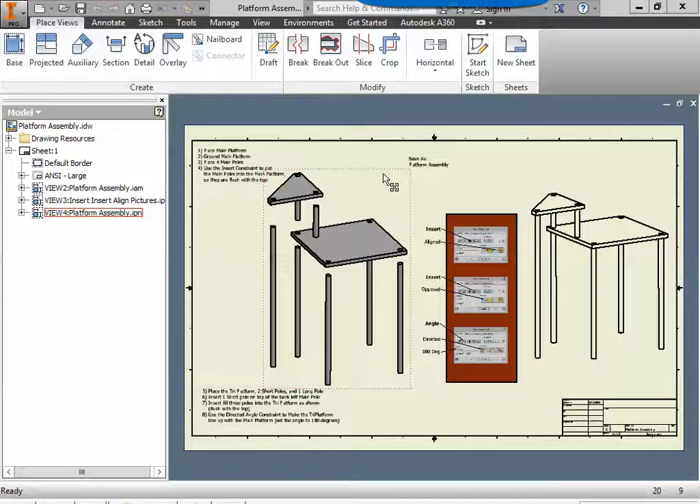In this episode, we're going to look at how to assemble the platforms together.

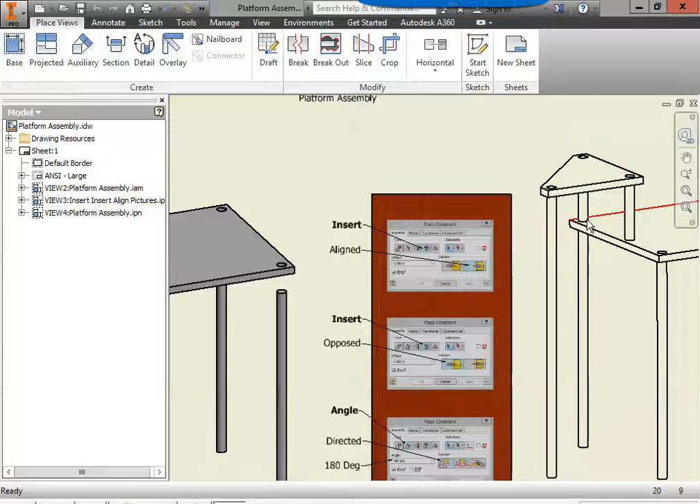Let's look at some of the tools or constraints we're going to use. We're going to use insert aligned so we can attach the poles into the holes. We're going to use insert opposed so we can put this short pole on top of here. And then we're going to use an angle constraint so we can turn this tri-platform so it lines up in the direction we'd like.

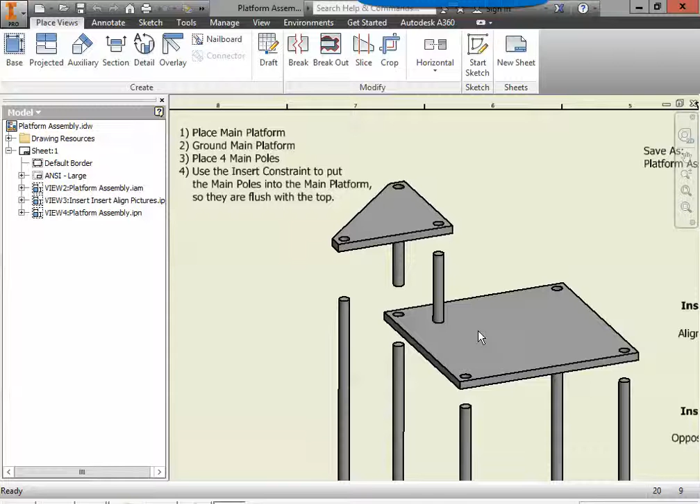Let's see the first 4 steps we should start with. Place the main platform, which is this. Ground it so it can't move. We're going to make sure we ground one part, and that's the main platform, only one part. And then we're going to put in the 4 main poles that go under it, and insert them into the main platform.

Alright, let's go to Inventor, a new standard IAM. We can go ahead and click place. We'll be placing the main platform. Looks a little weird, it's a little big. Go ahead and just click to place it. And it'd like you to put more main platforms in, but we don't need any more, so we'll just hit escape to drop our place tool.

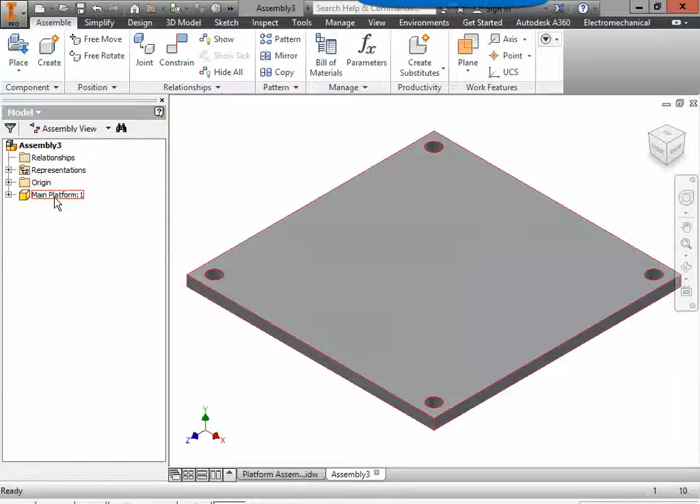Before we put poles in, let's ground this main platform so it cannot move on us. Over in the browser bar, we're going to come to main platform, right click on it, and select grounded.

Then we're going to come into place, and we're going to put 4 main poles. 1, 2, 3, 4 main poles. Hit escape to drop your tool.

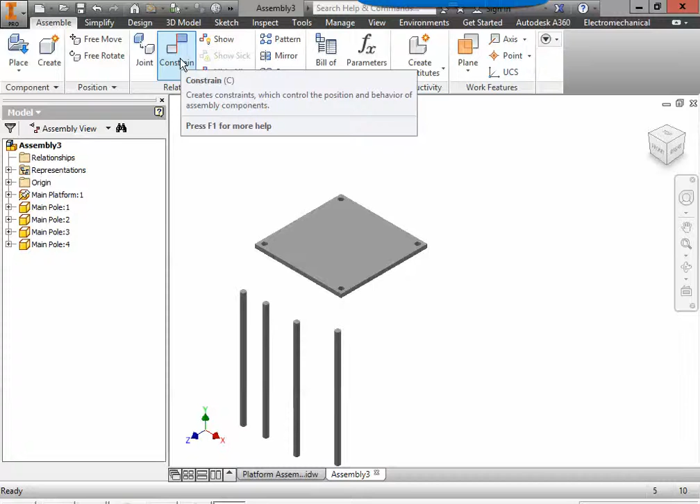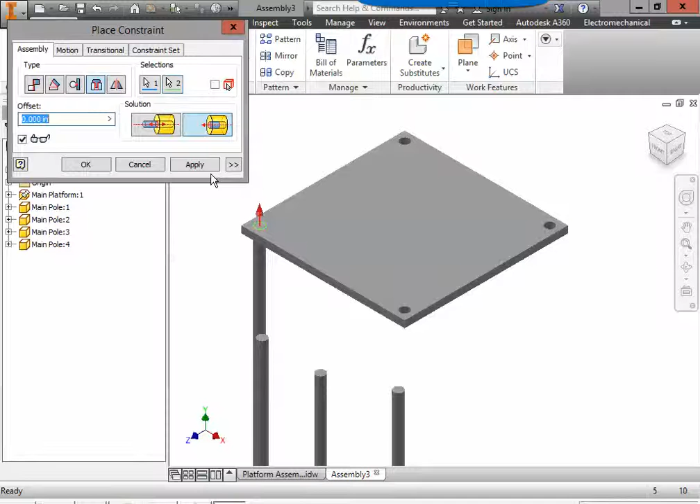We can come up to constrain. For the poles, we're going to be using the insert command, and we want them aligned with the holes, so we're going to go insert aligned. Then we're going to select the top of a pole, and you have 2 options, it could be the bottom or the top. We want the top of a hole, and then apply it. So top of a pole to top of a hole, apply. Top of a pole to top of a hole, apply. Top of a pole to top of a hole, apply. And then we can hit cancel.

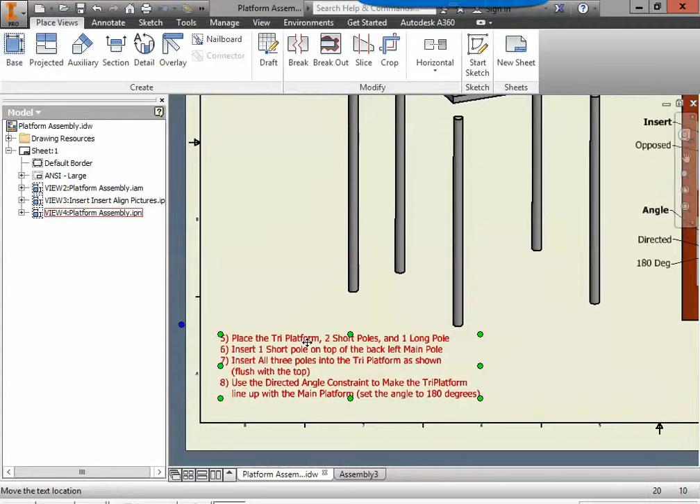Next up, we are going to be placing the tri-platform, which is this, 2 short poles, which are here and here, and the long pole. So let's go ahead and place those in. Let's place the tri-platform, place a long pole, place short pole, and we'll put 2 of those in there, 1, 2, and then we can hit escape.

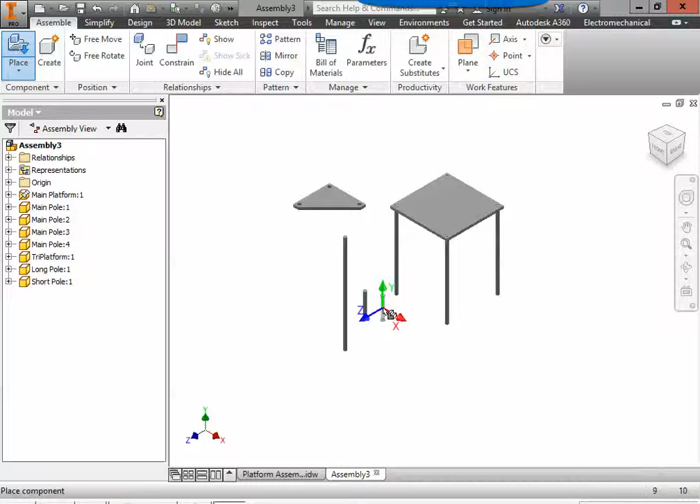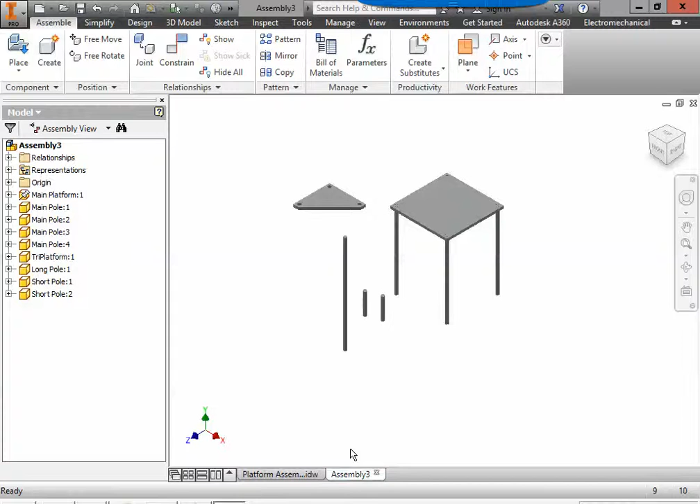When I'm looking at my drawing here, you're going to notice that tri-platform is in a little bit different orientation than it is right now. So I really have to look at this, and it looks like along my angled edge, I'm going to have a long pole over here. And that looks like it'd be right into here.

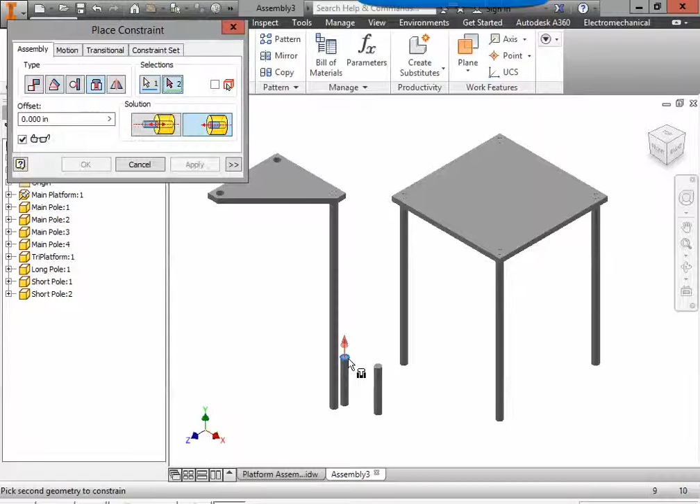So let's go up, constrain, insert aligned, and we're going to put the long pole, the top of it, into the top of the tri-platform and apply. Make sure it's going in this hole over here. Then you're going to put the top of a short pole in the top of one of the other holes and apply. Top of a short pole into one of the other holes and apply. And then we can hit cancel.

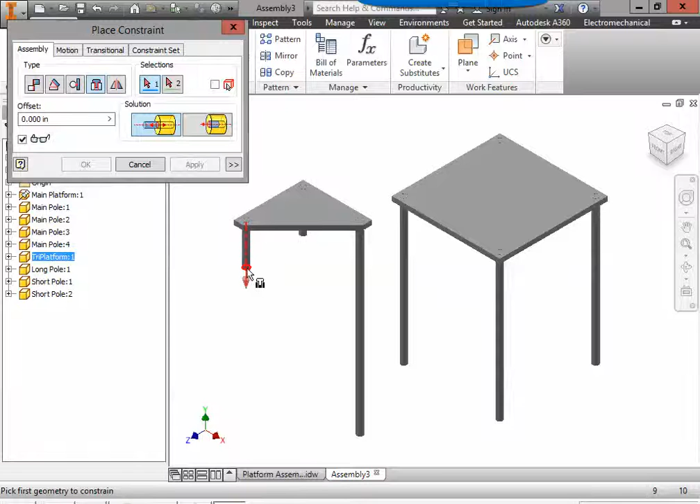Next up, this is going to get spun around, and this pole actually will be on top of this main pole. So we can go into constrain and go to insert, but this time instead of having them aligned, we're going to have them opposed to each other, so that the two ends butt up together. So we'll leave it on opposed. We'll select the bottom of this short pole and put it to the top of this main pole and hit apply.

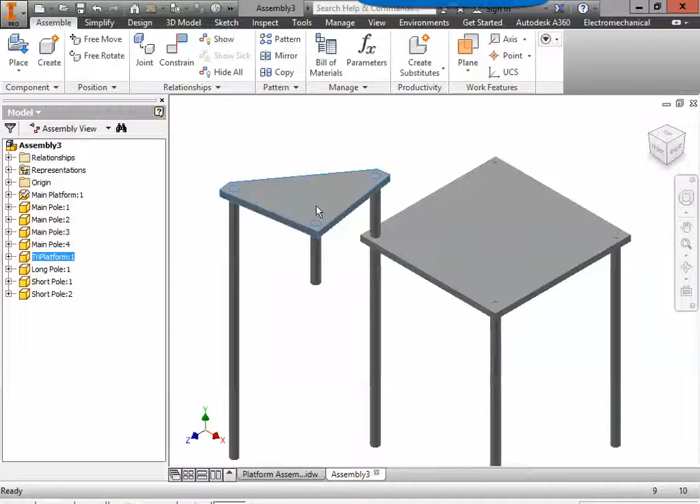Now if I spin this, that is roughly what we want, but it's not locked in place yet. So we have one last thing to do. Let's open this face up so we can see right here. We're going to use one of the harder constraints. We're going to come into constrain. This time we're going to use an angle constraint, and we have to select the first one. It's called a directed angle.

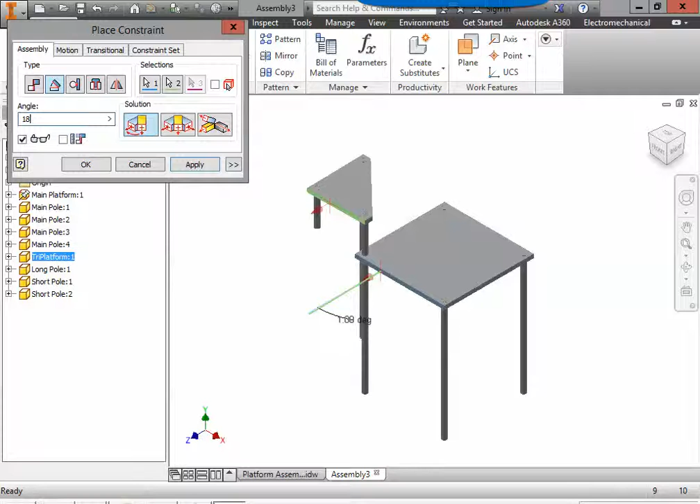If I were to select this front face of the main platform and this face of the tri-platform, it's going to put them at a 0-degree angle together. But there's a way we can flip this around so that they're facing each other. We're going to change this angle from 0 to 180. And then we can apply. Now, if I hit escape and drop all my tools, I shouldn't be able to spin the tri-platform.

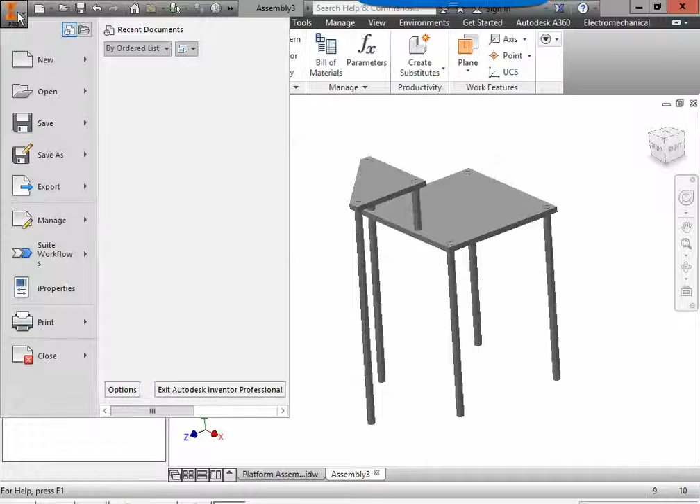Awesome. Now that that's all done, let's go up to the Inventor icon, click Save As. As always, we're saving in our H drive. And this should be called Platform Assembly. And you can click Save.